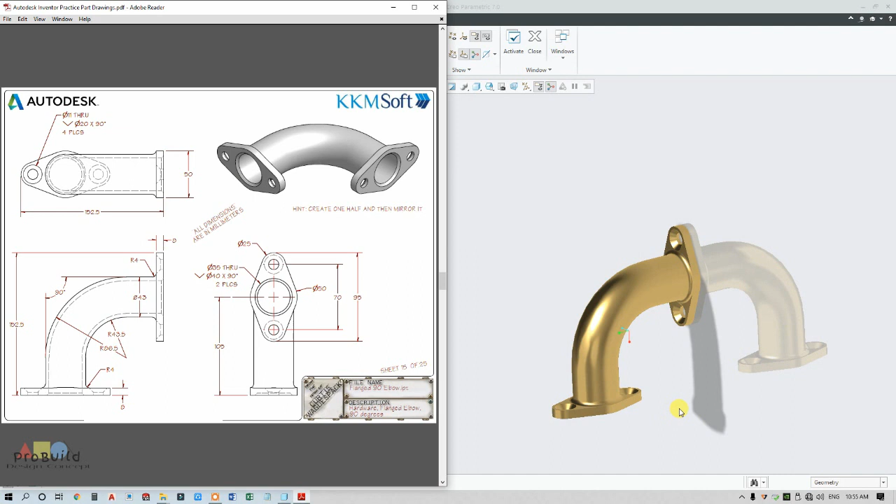So today we'll be making this 3D model. This is actually a flanged 90-degree elbow. So this is quite simple. I have already made this 3D model in PTC Creo Parametric 7.0, and just for your perspective I'm showing this part now. So exactly we will be doing this part, and I'll be teaching you how to study this diagram. Here we have some missing dimensions and we need to calculate them before going into the actual sketch. So let's discuss.

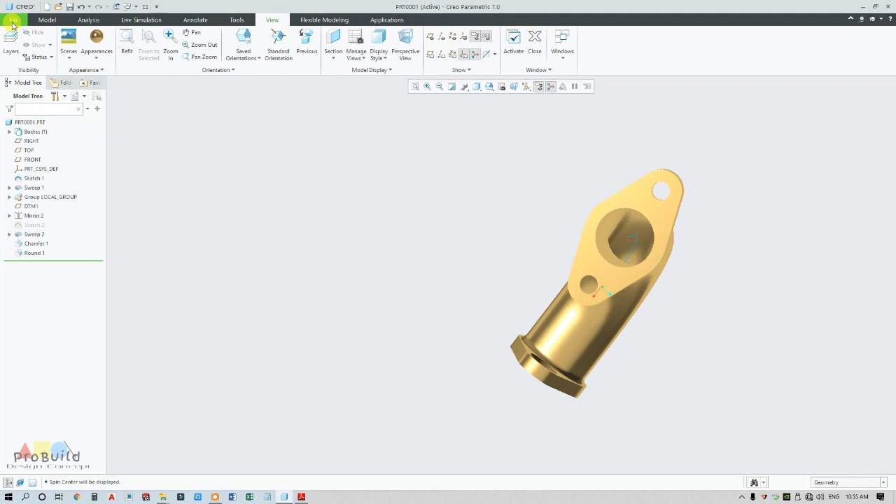We'll close this part and open new. So I'm going to choose mmns part solid absolute and switch on the plane display for my convenience. So now I'm going to teach you some basic operations today, which are very necessary for making this part. This is actually a solid part, and it can be made with a sweep operation.

Here they have given some center point. From here it is 86.5, and from here it is 43.5, and this sweep circle is actually 43. So either I can draw 43.5 and draw a circle of 43 and sweep, or else I can draw the 86.5 sketch and draw a 43 circle. So from here I can sweep.

So for easy convention I'm going to choose this center axis, because from the center axis to the bottom I can find the dimensions that have been given. So I'm going to calculate it. From this it is 43.5, and from here it is 86.5 and 43, so half of which is 21.5. So let me say the calculation. The sweep circle is 43, so 43 divided by 2 is 21.5, plus 43.5 is 65.

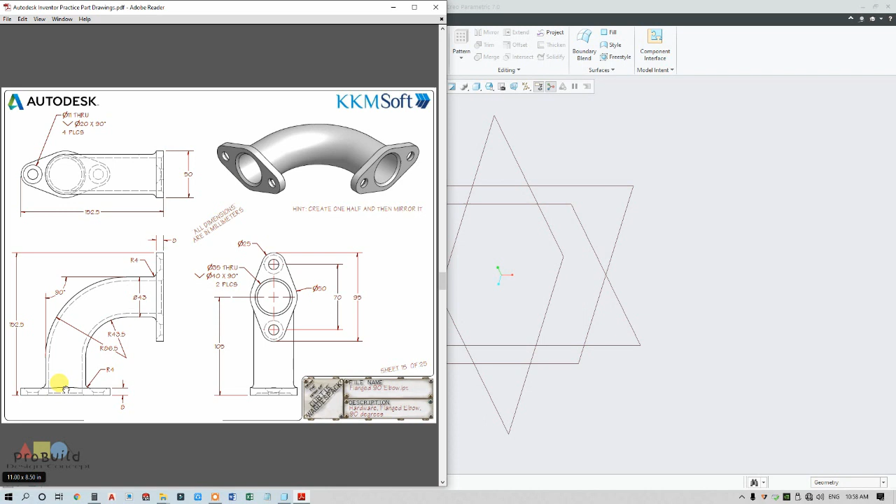So with other dimensions you can give it as a baseline dimension. From this center to the bottom surface it is 105, and this thickness is actually 8 mm. So 105 minus 8 will give you this point. 105 minus 8 is 97. So from this center to this part is going to be 97.

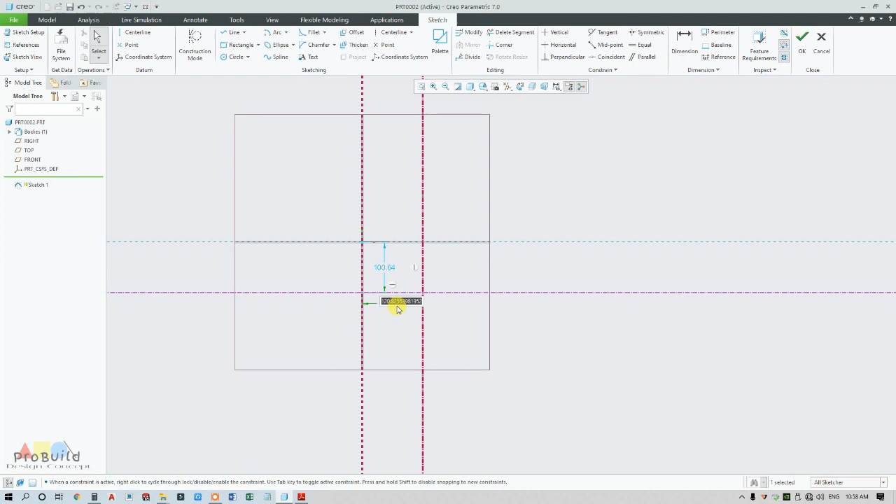So I'm going to choose the front plane and go for sketch, because I need to draw my first sketch. Changing this to sketch view. Now I'm drawing two center lines, one vertically and another horizontally, and this is going to be my offset of 65 since it is going to be the radius. So even this is going to be 65, and in arc choose center and ends. This point is my center. From here I'm going to make an arc of 65. So you can just confirm, it is arc 65.

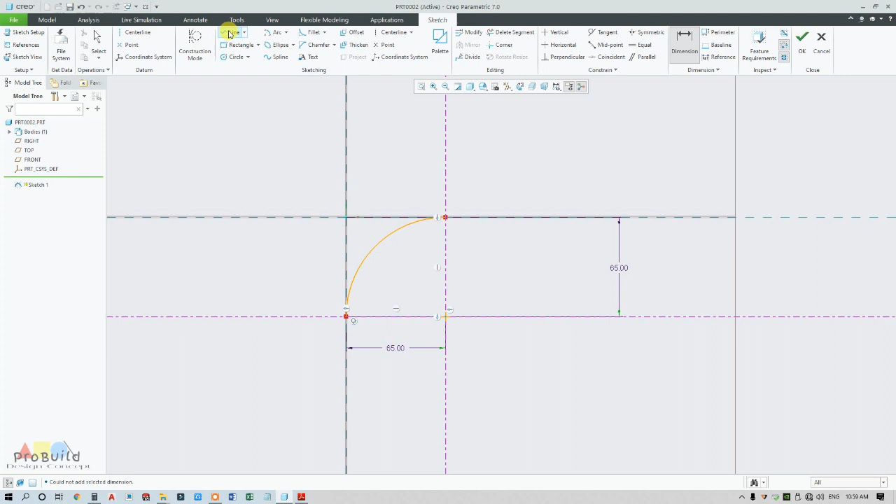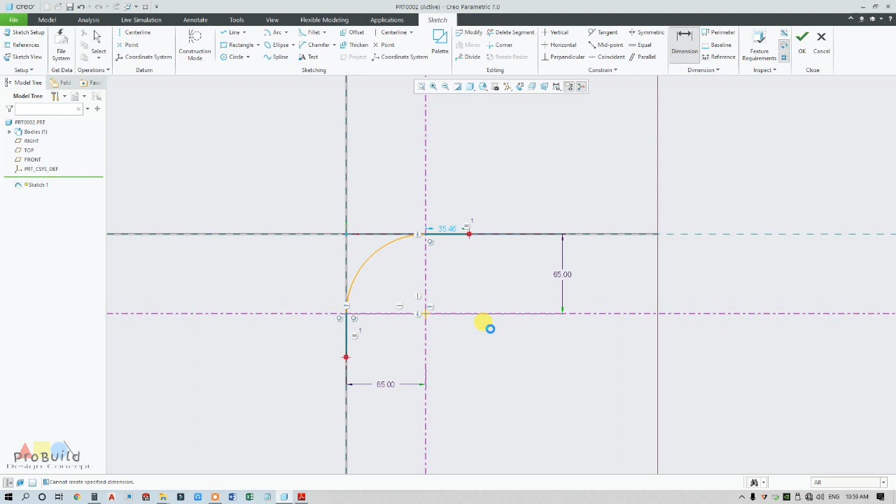So I've drawn it. Now draw an equal line from here and here as well. So you can find this equality constraint. Now as I said, from the center to this bottom surface is 105, and I need to minus this thickness. This is 8 mm, so 105 minus 8 is going to be 97. So from this center axis to this bottom is going to be 97. Now switch off the plane, so you can see the sketch. Actually this is the sketch that I need.

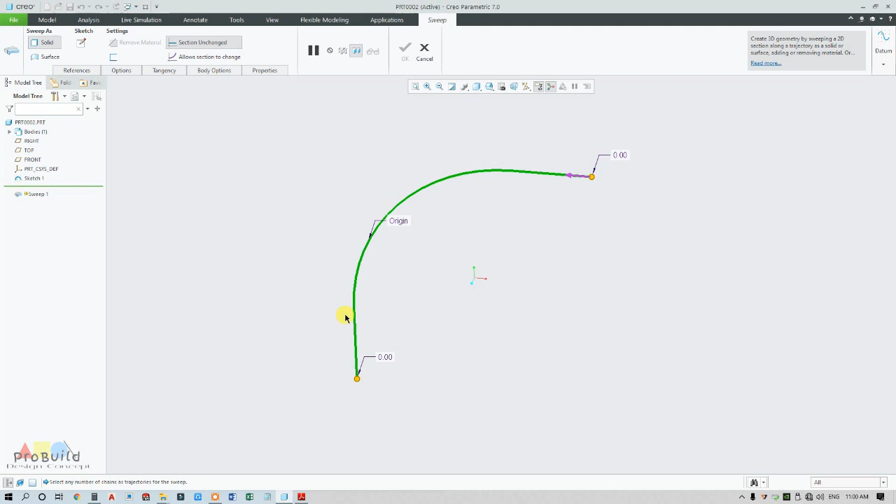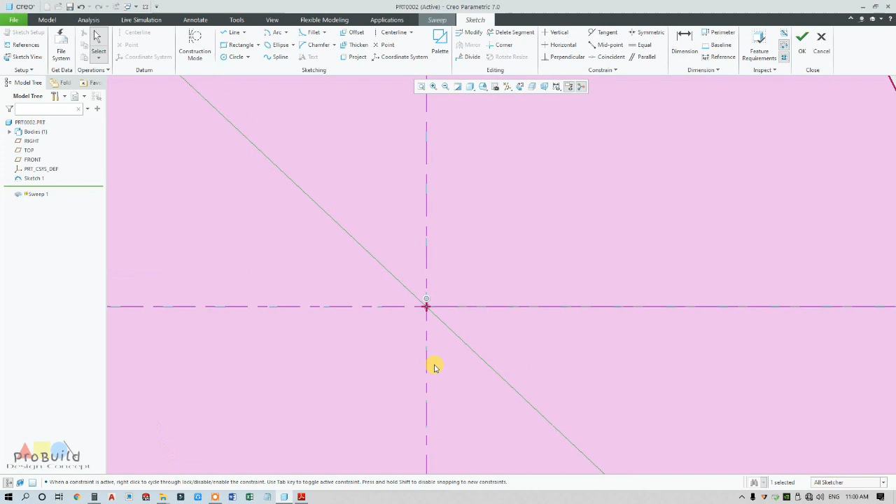So just select the sketch, go for sweep. It becomes highlighted. I need to draw a sketch here, through which it goes all the way along the sketch. Go for the sketch option, and you can see one horizontal and vertical line. Now you need to draw your sweep profile here. My sweep profile is 43, one circle. So I'm going to draw a circle of dia 43. Once you click OK, my profile is generated. This profile is ready. Now click OK, and change this to shading with edges, without the plane.

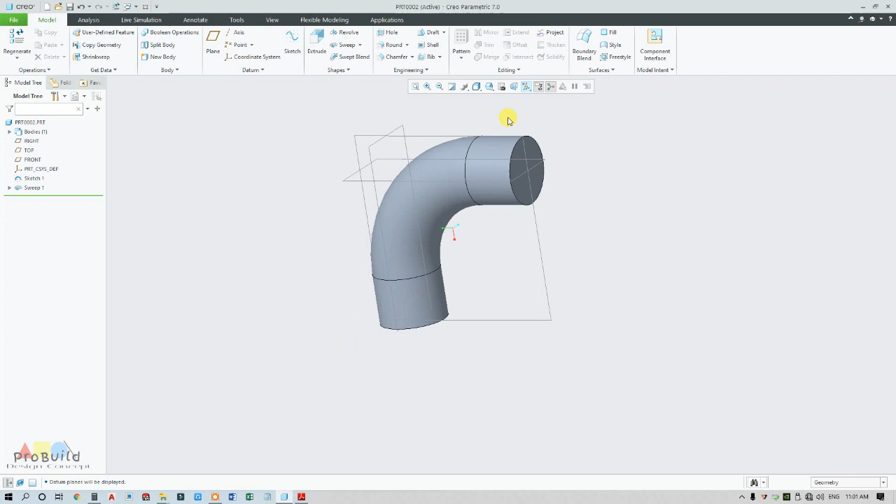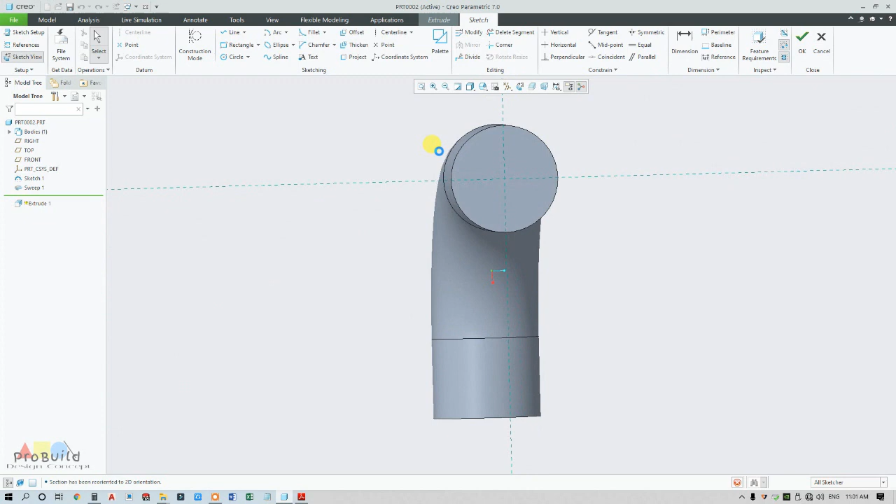Now I need to draw the two pieces. I need to draw this piece actually. Its data is given in the side view. You can see here that the major circle is dia 50 and both end circles are dia 25, and its overall head to tail distance is 95. So I'm going to select this surface, go for the extrude option and choose this circle as reference.

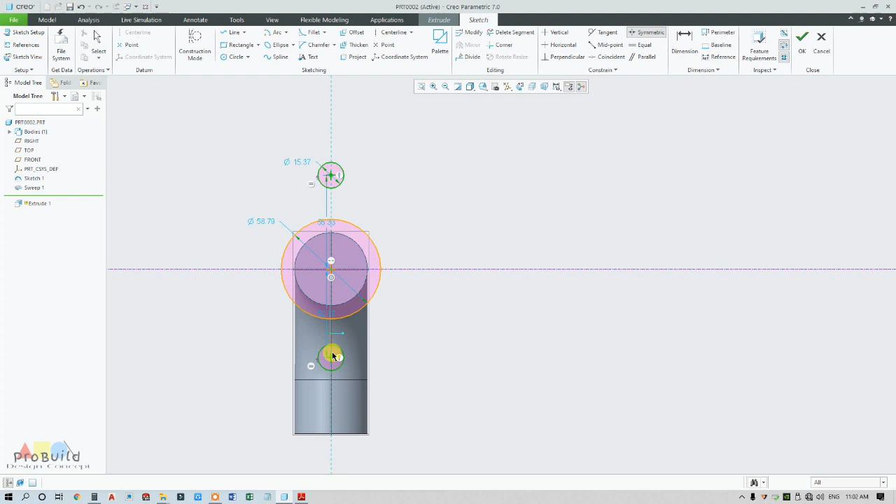Now I'm going to draw one bigger circle, one smaller, and another smaller of the same dia. So I'm putting an equal constraint here. Now draw a center line for making these two circles symmetric to this horizontal plane. So it has become symmetric. Now change this to 50 and these to 25 and 25. So from head to tail you can find it as 95.

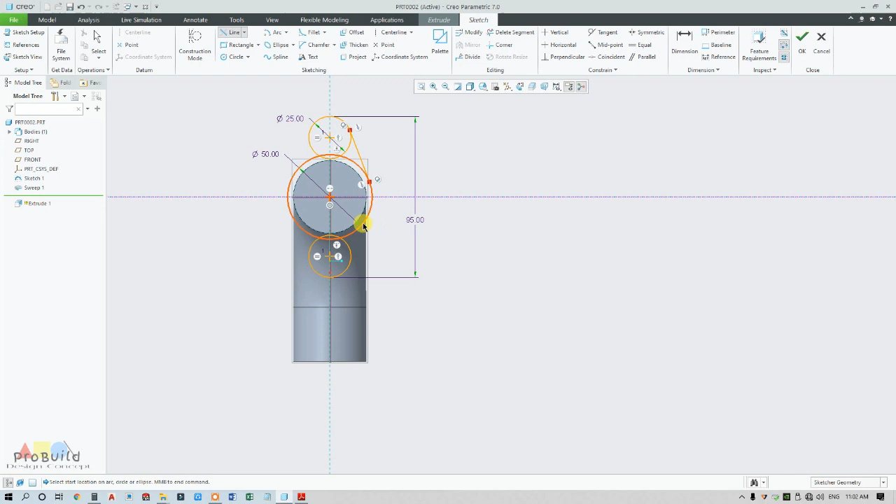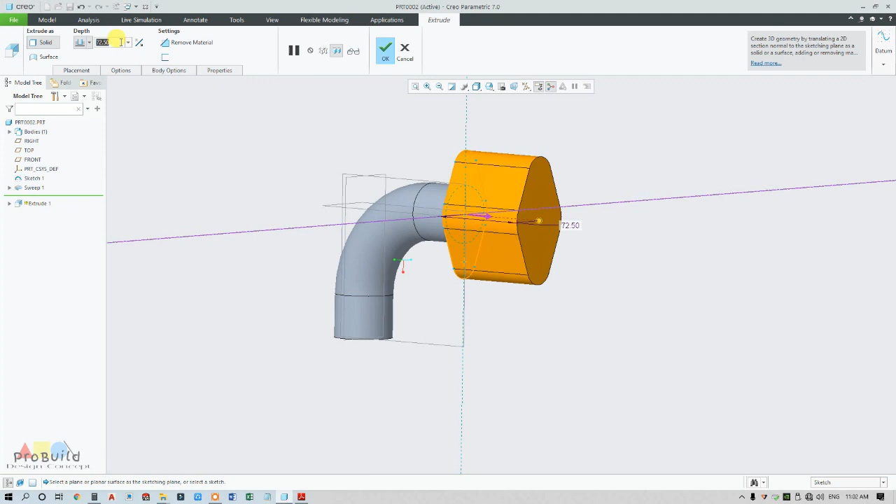Now go for line, under which you can find line tangent. Select both circles and join it to the line. Now go for these extra unwanted segments and just delete them. You can find here the complete profile. So it is having the thickness of 8 mm actually. So I'm going here and changing this to 8 mm. So this is what I expected.

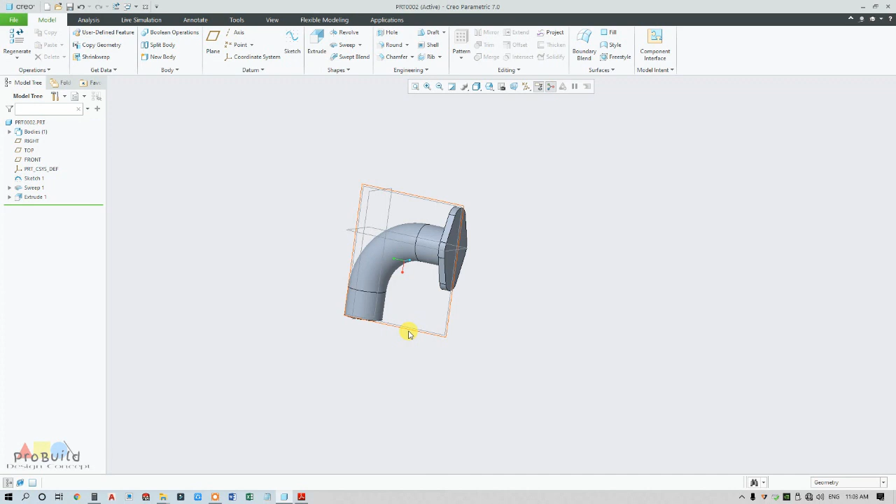So you can create one profile and you can just have a 3D mirror of it here. I will teach how to make a plane at mid bisector. So let me complete this part completely. Here you have two holes, and its detail is given here. It is 11 through, and this symbol is actually countersink. It is having 20 into 90 degree, 4 places. So 1, 2, 3 and 4.

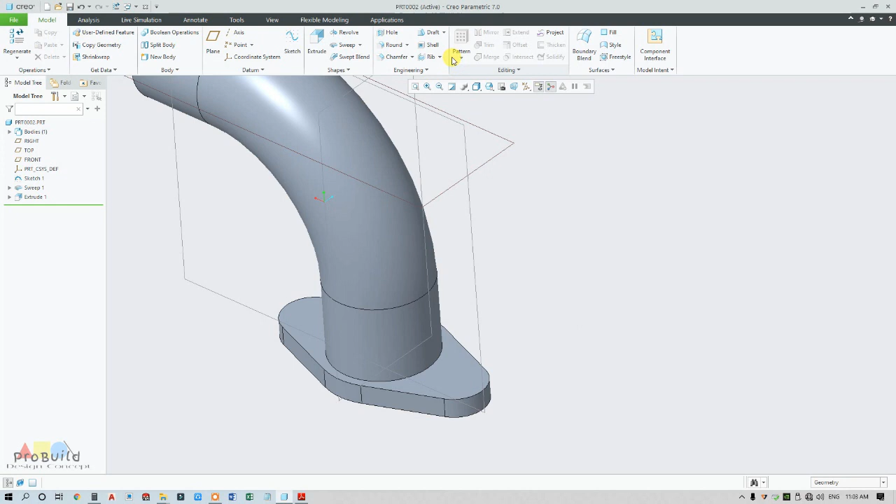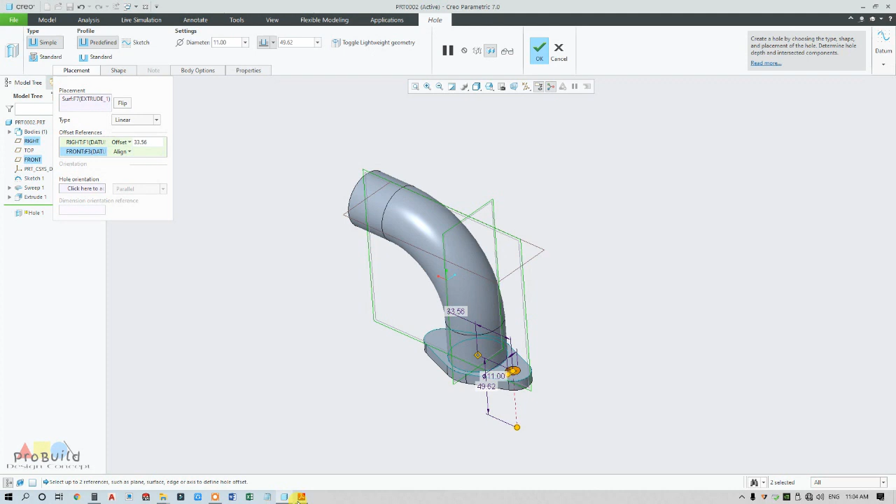So it's 4 places. What I'm going to do is just turn over here, select the surface, and go for hole. Now I'm going to connect this clip to this plane and to this plane. Go for placement, just make this align so that it becomes concentric, and from hole to hole you can find it as 70 symmetric. So I've connected one of my clips to this center plane, so half of which is 35. So here I'm going to change it to 35. It's changed here, it is reflected, and just go for shape.

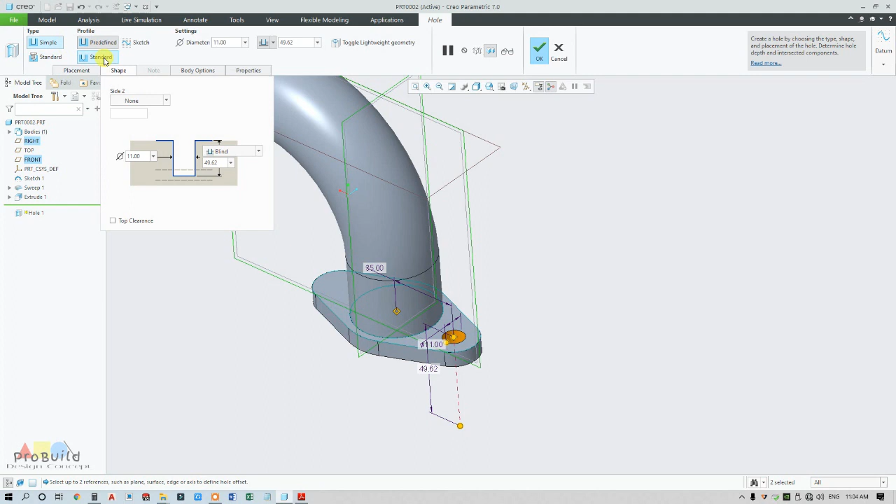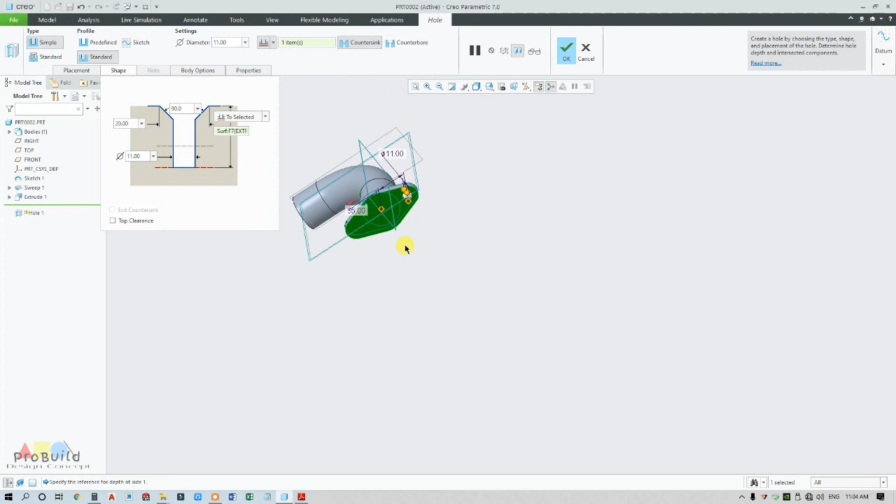Actually this is one kind of simple bore. So under simple you can change to standard, and here you can change this to countersink. Here my value is 20 in this diameter, and here is going to be 11 in diameter, and I'm going to extrude up to this bottom surface. Yeah, my hole is ready. So this hole is going to be 3D mirrored against this plane so that it comes to the opposite side.

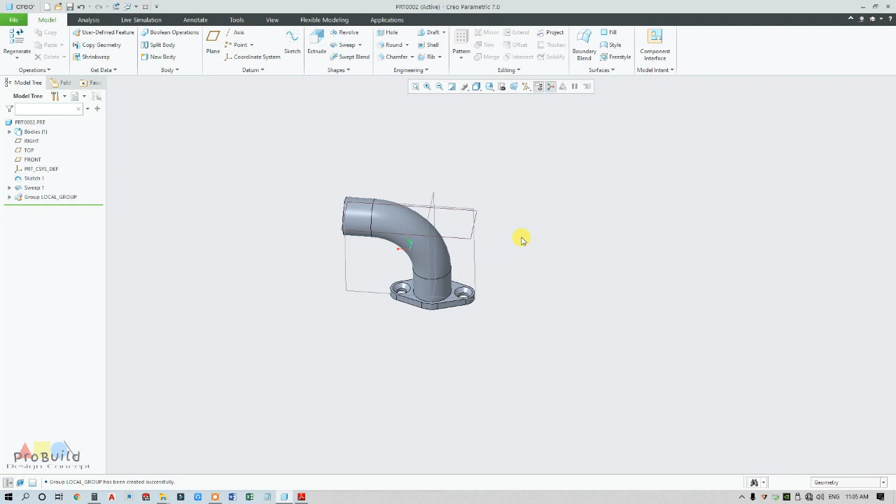Now I'm going to select this part, these 3 operations. Go for group. Once you select this group, all the operations will be selected. Now I'm going to make one reference plane, for which I need to go for plane, select this plane and control against this plane. And here you can go for bisector 1 so that it comes in 45 degree to your side.

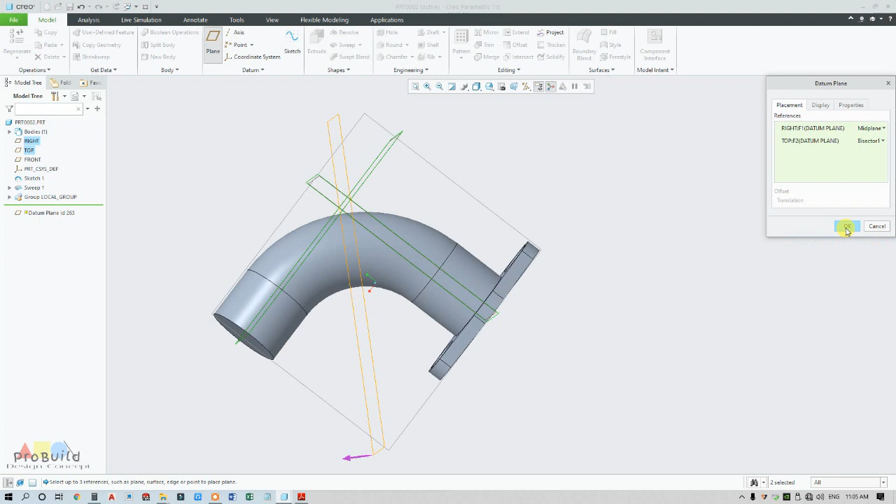So just click OK. Now I'm going to select this group, go for 3D mirror, and select this reference plane so that it gets 3D mirrored. Else this will not work. If your reference plane is incorrect, it will just misplace the 3D mirrored object. So just place the plane correctly and properly. So actually this is mid plane bisector 1.

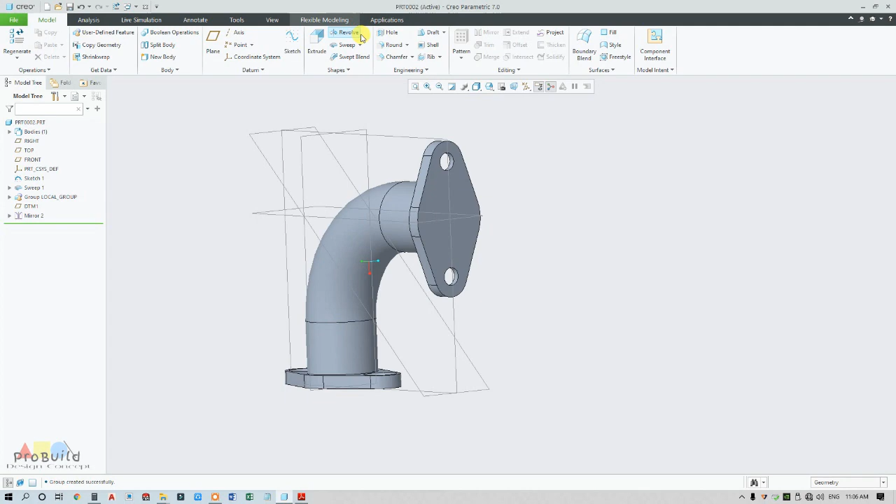Now I need to create a hole, and its hole value is given here. This is 35 through, and 40 into 90 degree is obviously a chamfer, so I can just go with chamfer, no need for countersink. Also I can't place a countersink here, it's a very tedious job. I'm going for 35 through. I can't make shell. If I just go for the shell option and click here, you can find all the things have gone into shell. So I can't go with shell, so I will go with sweep once again.

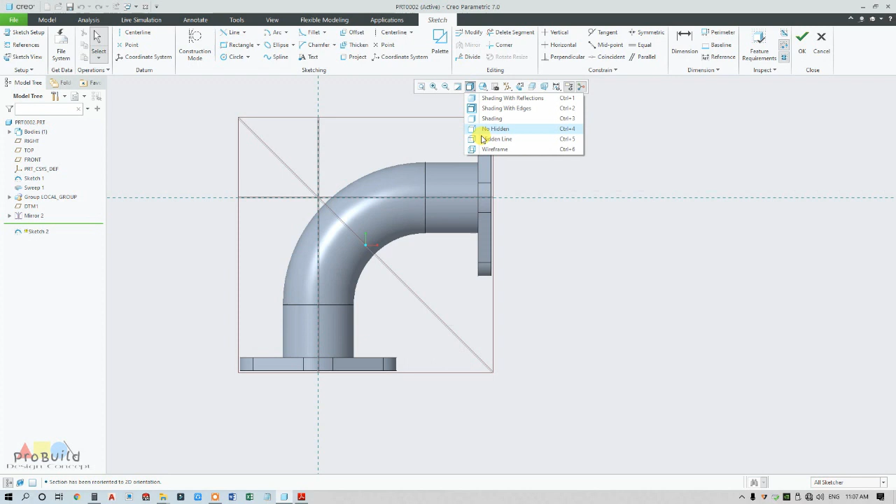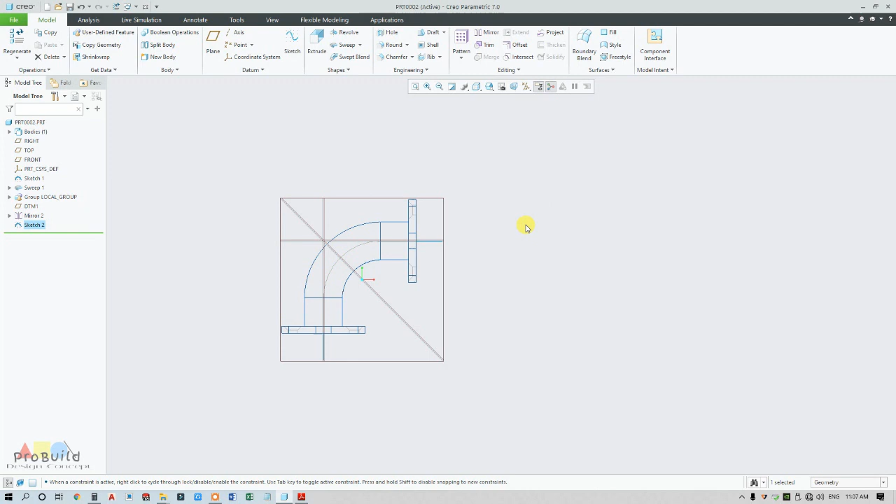So what I'm going to do is select this front plane once again, go for sketch, make it a sketch view, and change this view to hidden line. Here you can find your holder sketch. This is sketch 1, right? Just go for project and project this sketch, and from here I'm going to draw a lengthy line, because this is going to remove the material, so no need for dimension. So my sketch is ready. Select the sketch, go for sweep once again.

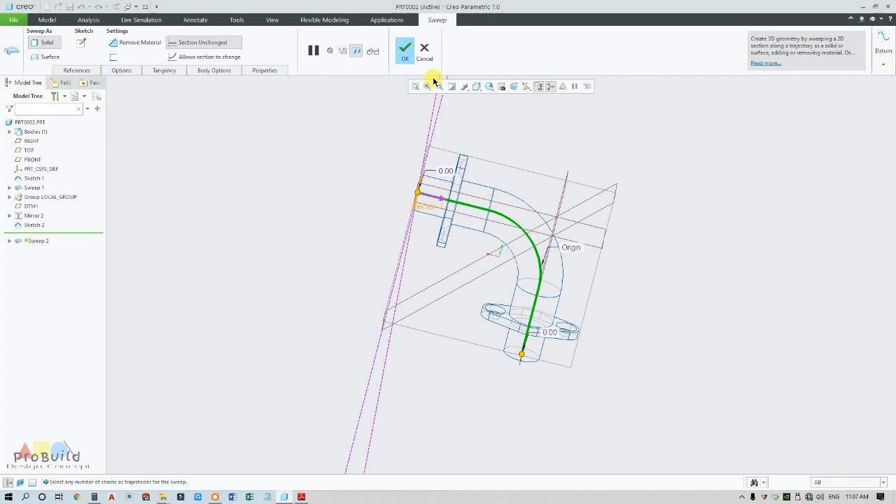Actually it is said that it is 35 in circle. Go for sketch view, draw a circle of dia 35, and sweep all over the way and remove material so that it sweeps inside. Okay, it has got swept. Now I'm going to make chamfer.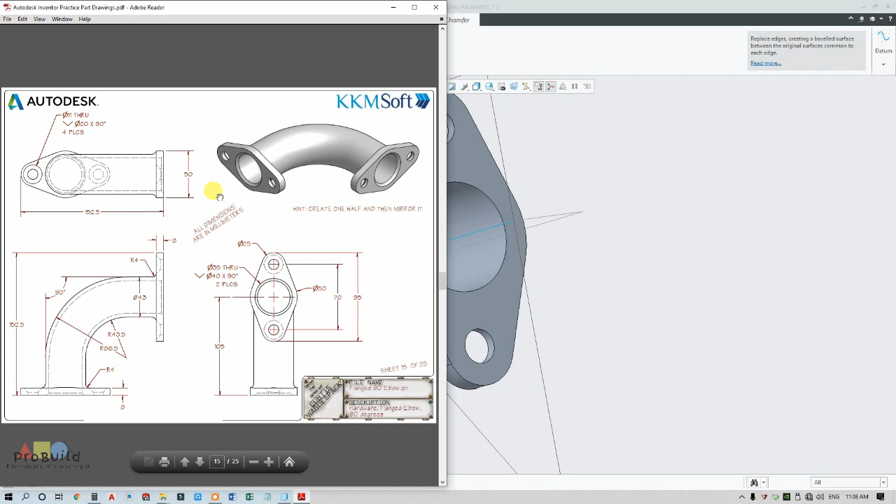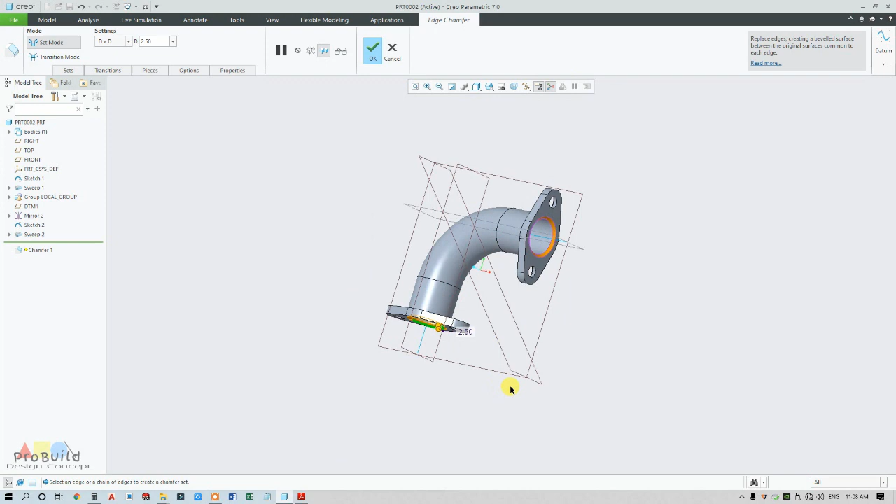Actually this is 35, and here you can see it is 40. So chamfer I can give as 2.5. This is 35, so 2.5 here and 2.5 here, which gives you 40. So just click OK, and I want to make this on either side as well. Now click OK.

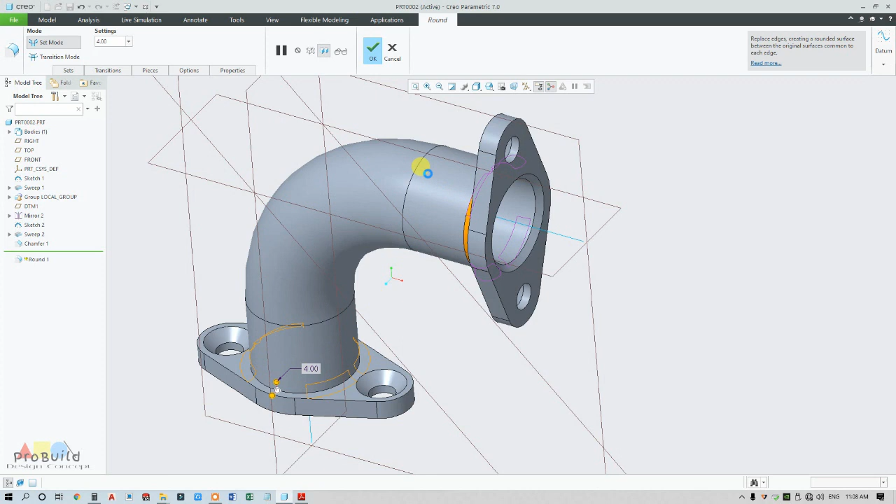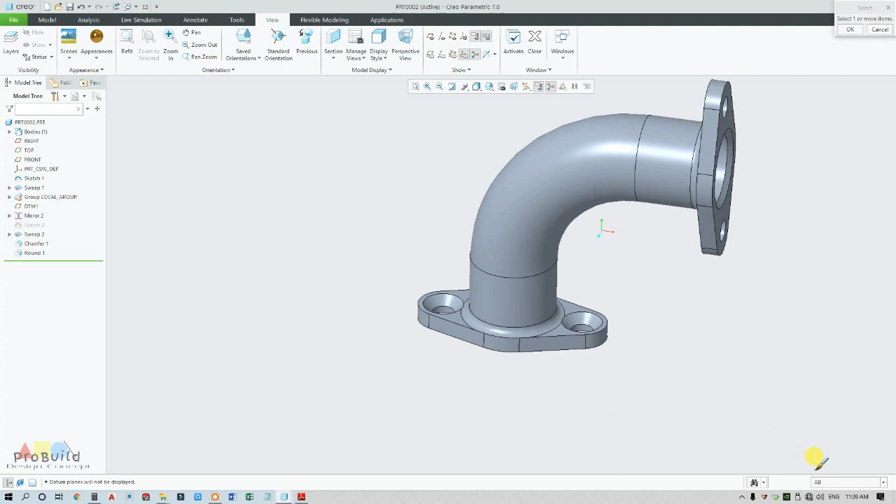Now the last and final operation. Here they have given round, fillet as radius 4. Just go for round and click this edge, change this to 4, and this edge as well. Click OK. Now switch off this plane and hide the sketches. So my part is completely ready. Now go for view, appearances, change this to golden color, and change this view to shading with reflection. So my part is ready.